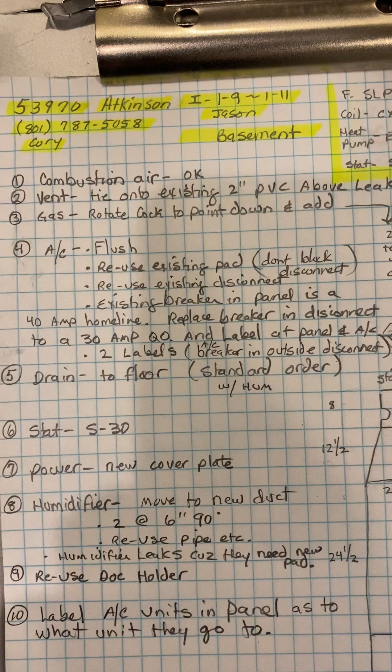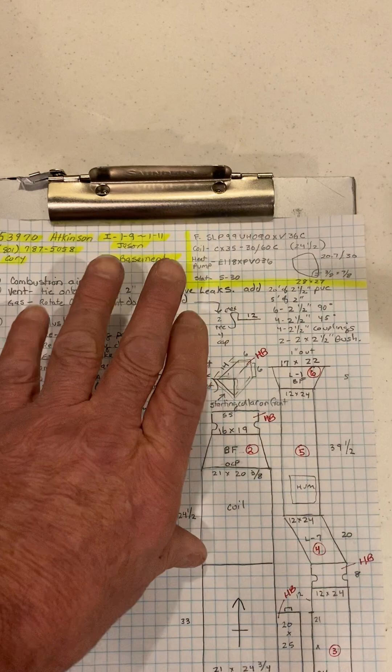Okay, this is on the Atkinson job, number 53970, install on 1/9 through 1/11 by Jason. There are two systems we're measuring. This is video 1 of 2, for the basement system.

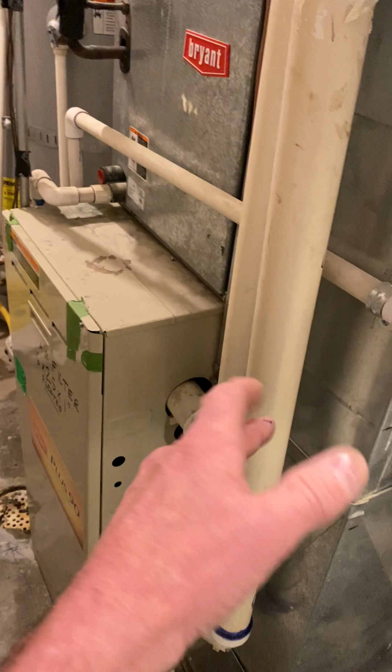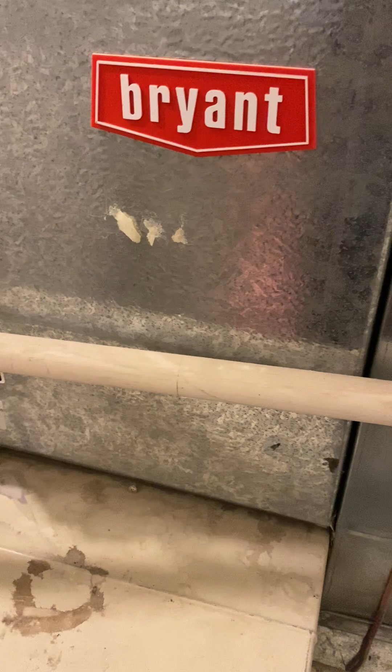So we're switching out this 90% furnace with another 90% furnace, 2-stage, adding a heat pump. The new furnace will sit center where it is now, so it's going to come over 1 3/4 inch on each side.

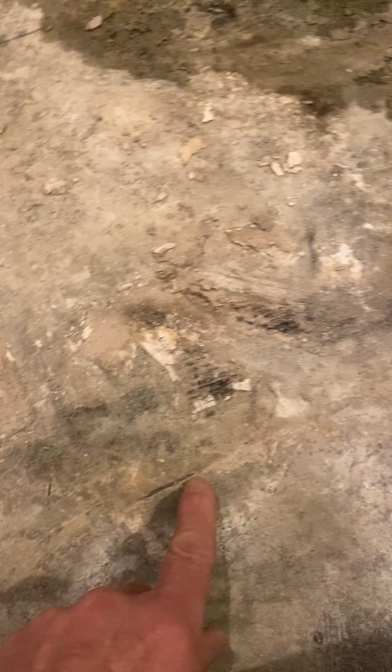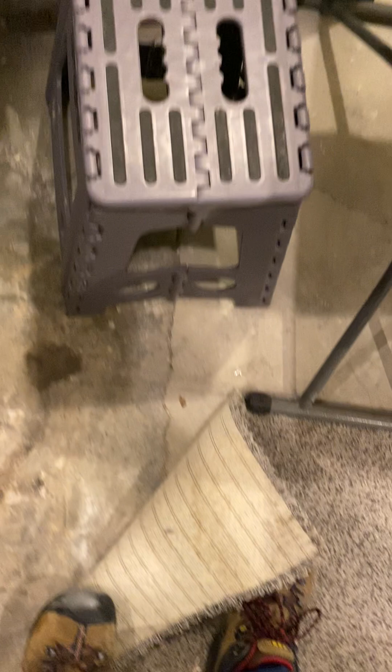Okay, I wrote on the floor if it's still there. Our return air is going to come out to right here, this line, and it's about even with this wall here, maybe out another 1/2 inch or so. It's close to that wall here.

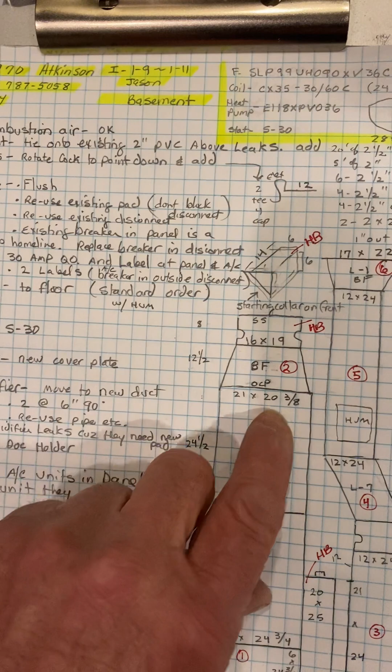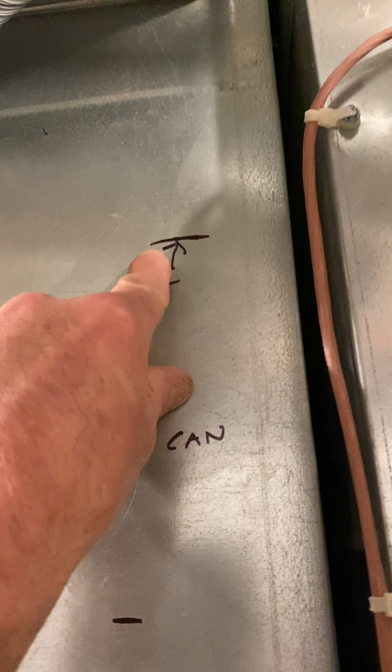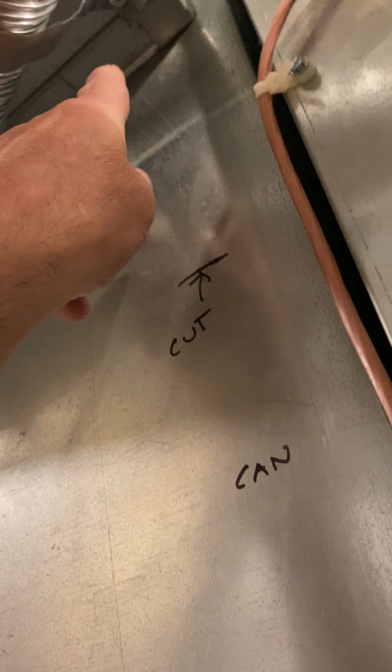Anyway, so the furnace will sit on a base - furnace, coil, transition, and can. We have a starting collar for the front. I gave you a cut line right here, and a 6-inch starting collar. This is 7, so it should go right down to your 1 inch down. You just have to pull this out in front of the starting collar as needed.

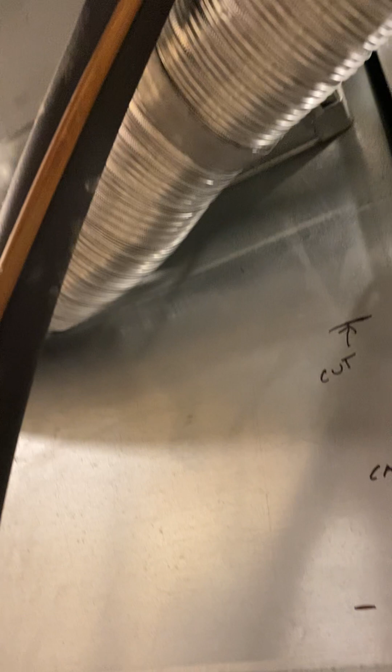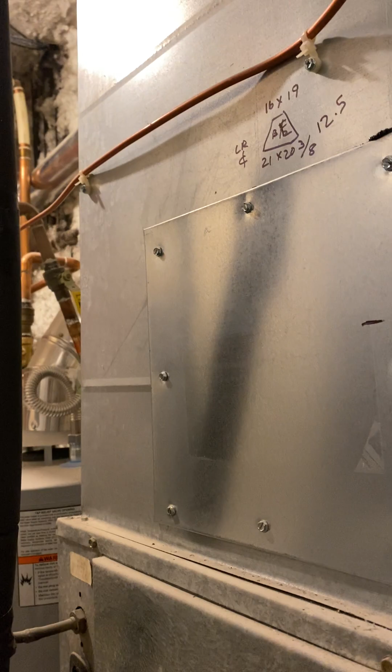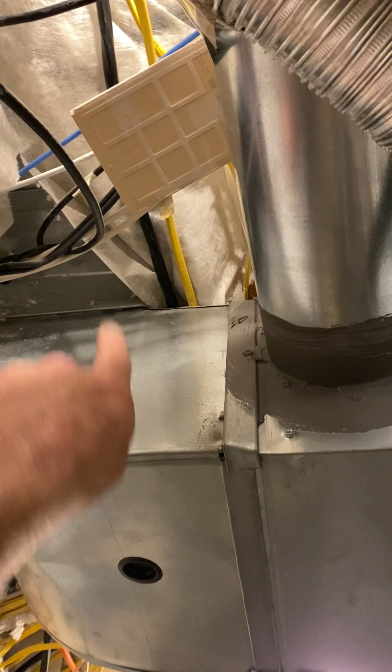Okay, I was debating if you can even get vanes up in here. I know you can get vanes in this one, but to reach around the corner and get them on that top one too, I'm not sure. I'm going to go ahead and give you some vanes to get these, and if you can get that top one, great. But you'll at least be able to get this one.

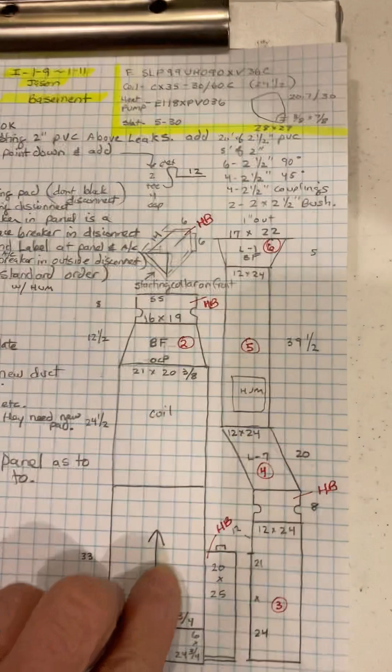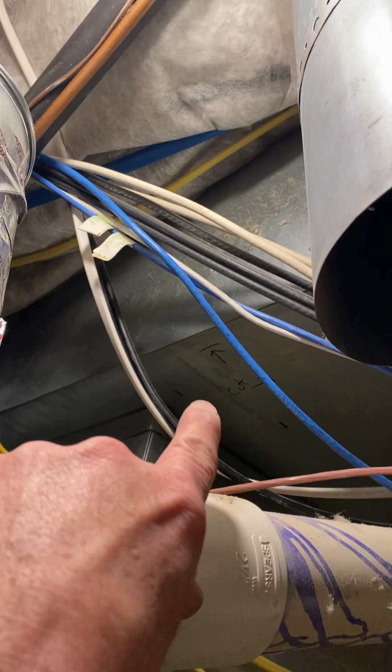Okay, anyway, so the return, gonna put a 20 by 25 filter box on. Return air just as it shows. I'll give you cut lines right there, so it's gonna go over 1 inch, and the rest is gonna go over to that cut line.

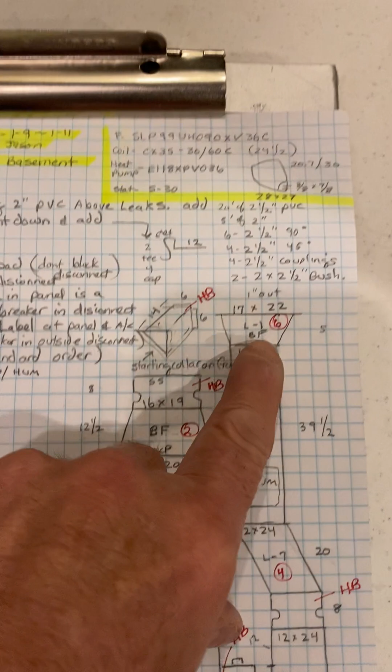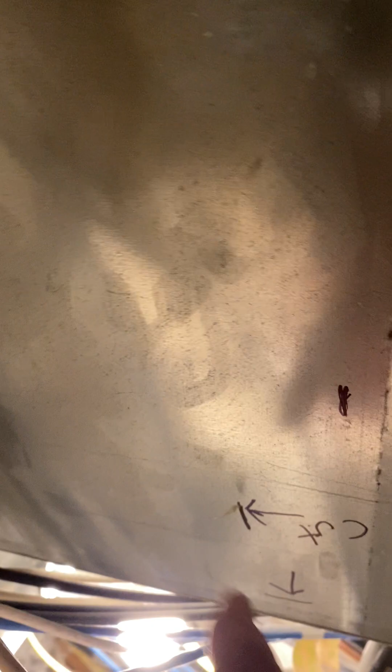I made that 5, so you can see - maybe cut lines over these flues a little bit. But you can see that the flues come in crooked, and they all leak. You can see all the water on the ground from the flues leaking at every joint. So Dwight wants to just cut them back here and add to them, so when you cut them, you can make them straight if you want.

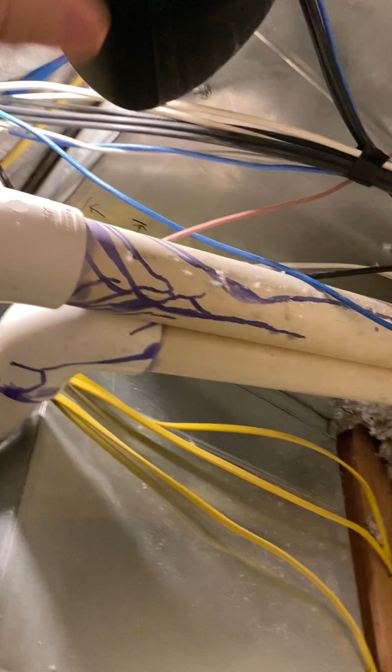And this is 2.5 inch, so I give you 2.5 inch couplings and things. I run them 2.5 inch over and then down, and then I give you another 2.5 inch coupling with the bushing to 2 inch into the furnace. So yeah, just get rid of all the leaking on there.

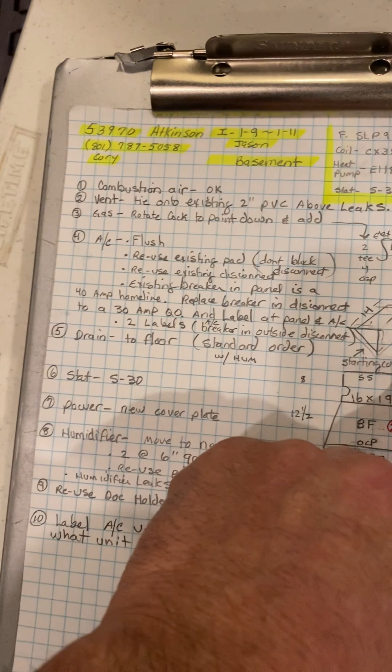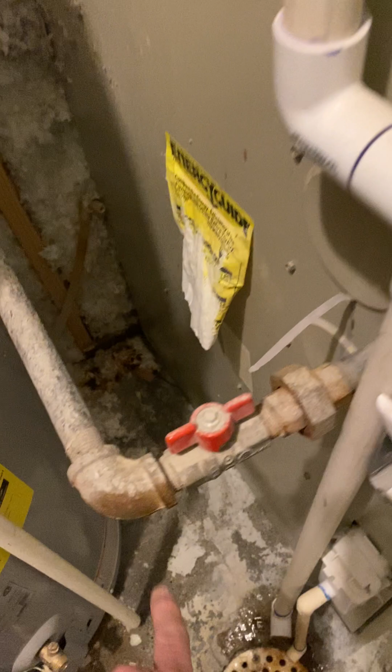Okay, combustion air is okay, it's right there. Your vent, I just told you about that. Your gas - so on your gas, right here, our new furnace is going to come over 1 3/4 inch. So you're going to turn this at 90 with the cock facing down, and you're going to add a T.

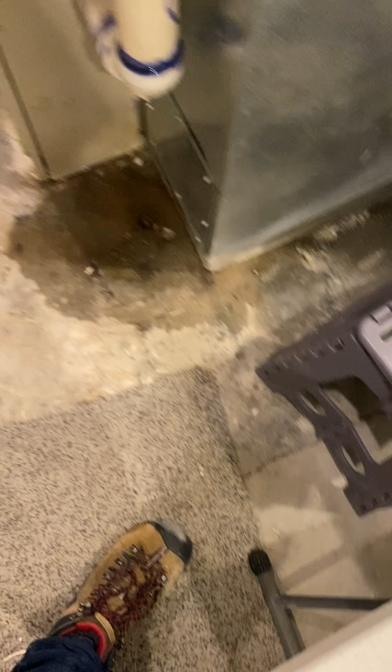With a drip leg and a flex 12 inch into the furnace. Okay, on the AC, I'll go over that in a minute. Your drain is just going to go to the floor, so standard order, but you'll need a little more for the humidifier.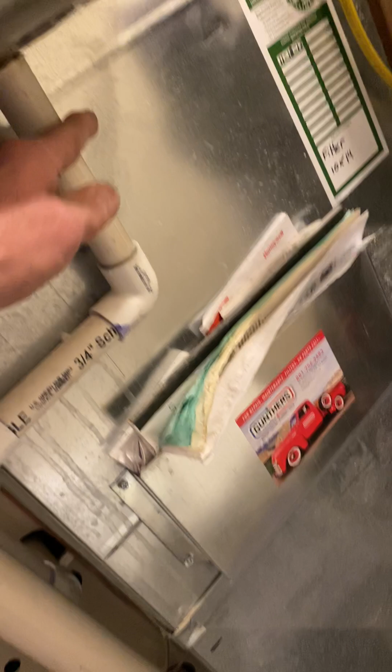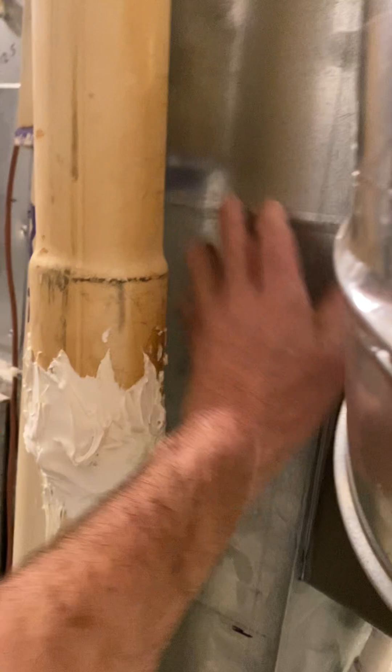We're going to move this humidifier as needed. Figure when you get everything in, if there's enough room at the front, we'll put it right at the front here, because now this duct's going to be way out here and we don't want it coming out into the walkway. So I'd say put it over here and redo the duct as needed. Reuse this pipe, I gave you two 6-inch 90s - you may only need one, but just in case.

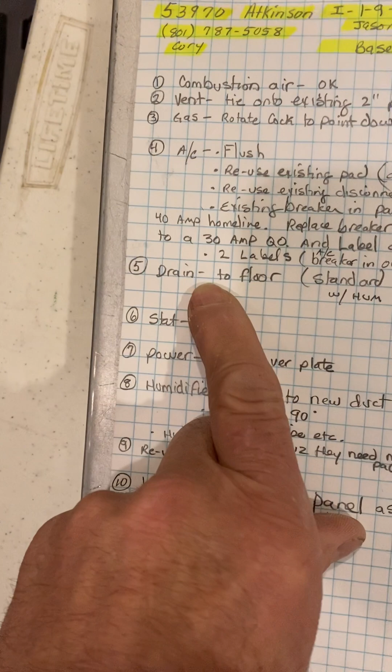Okay, thermostat - you're going to put an S30 stat on. So your power, reuse a box and switch. I'll give you a new cover plate, that one's broken.

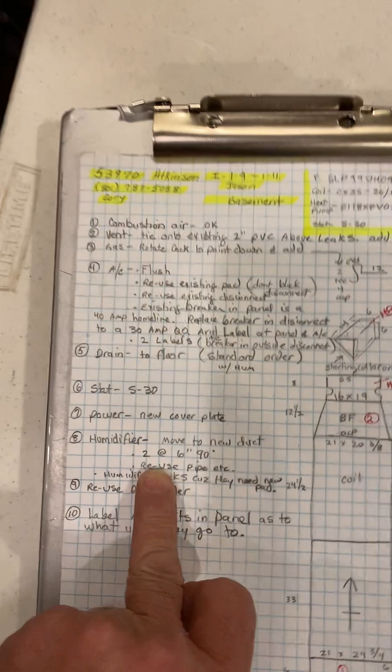So I told you already about the humidifier to move. Also on the humidifier, when you move it, it's also leaking, because the pad in there is so old and corroded, and it's just not doing what it needs. If I see them, they said they're probably going to be gone when I'm done, but if I see them, I will tell them they need a new humidifier pad. Otherwise, you can tell them that they need a new one.

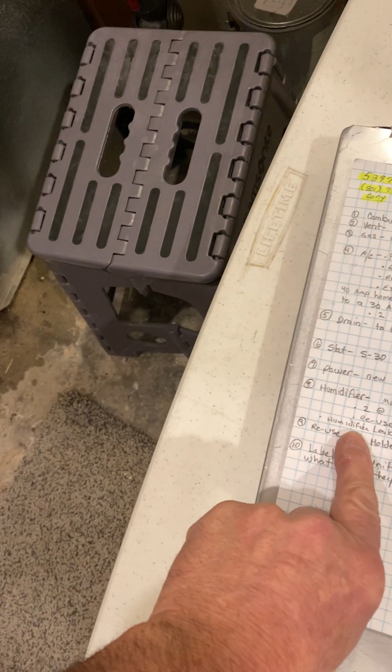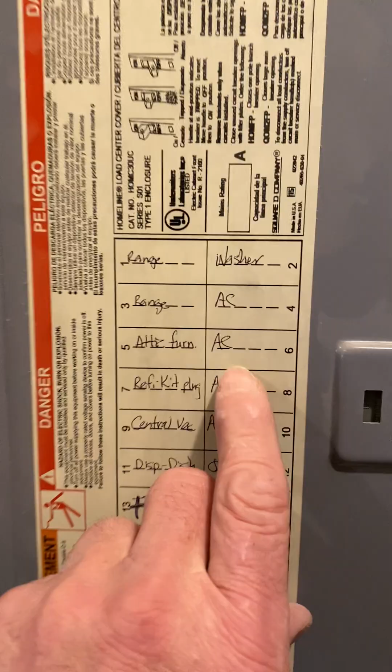Okay, reuse the duct holder. So label AC units in the panel as to what units they go to. Right now in this panel in the furnace room, we have the ACs labeled, but we need to put AC top floor and AC basement, or however you want to label them. They're both 40 amp breakers.

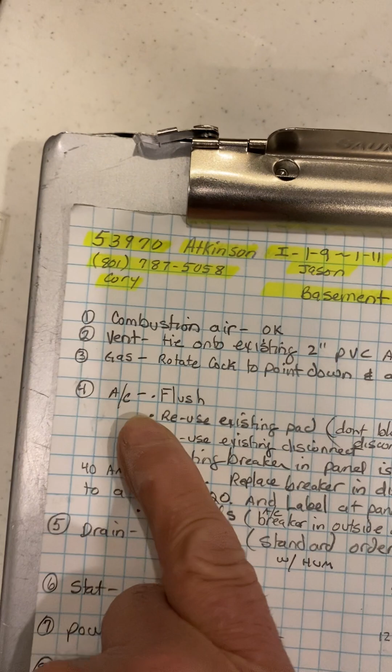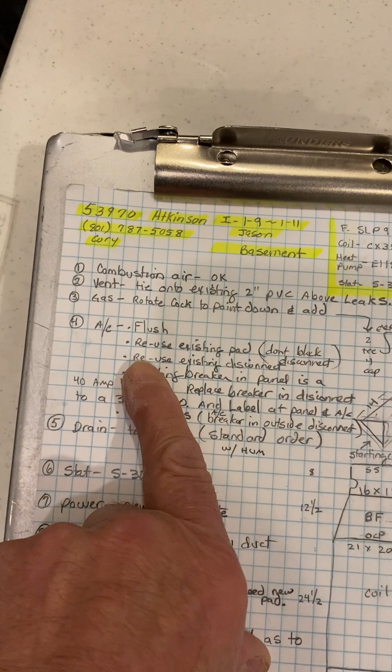So our AC for the basement, the max breaker is a 30. You're going to reuse the existing 40 here, but you're going to put a 30 amp QO breaker in the outside disconnect. Okay, so on the ACs, I'm just going to walk out there and show them to you on this video, and I won't on the next.

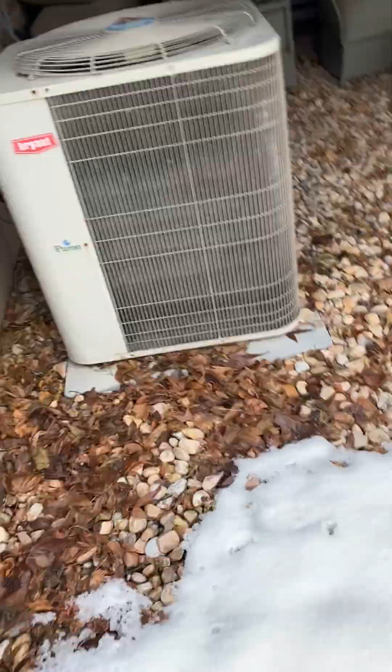Okay, so on the AC, you have to go through the pool. In the gate mechanism, you have to pull this knob at the top here, and then it pushes open. But the ACs are back here. Notice one is just slightly in front of the disconnect, so you probably just need to move the ACs over just a little bit.

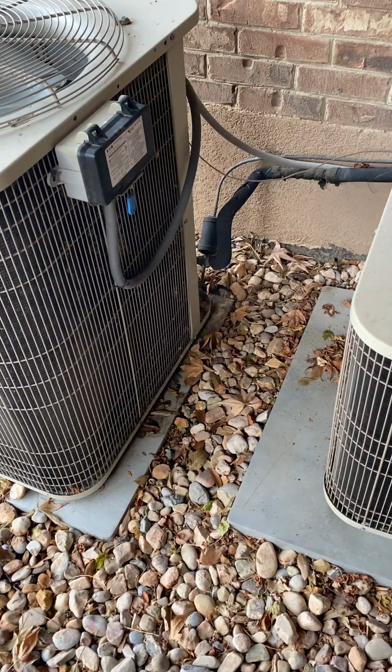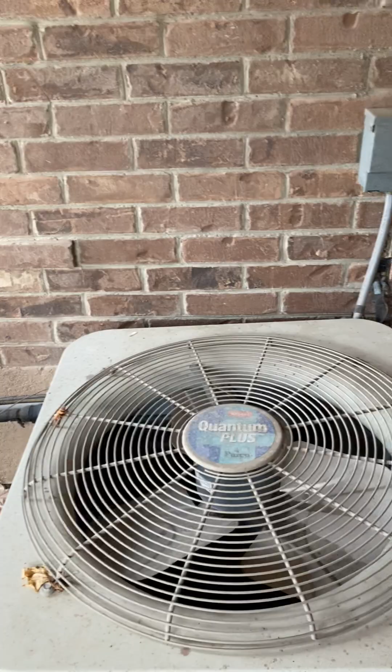And we'll just reuse the existing pads. So on the AC - I'm not sure what one is what, to be honest - but on the unit that we're switching out, or adding the breaker for the basement unit, I'm going to have Brian build a couple tags that say AC breaker located in disconnect, and you need to put one on the disconnect and one on the breaker panel inside. We got called on that in the past.

Anyway, so while I'm out here, you're going to flush the lines, both of them. The one for the top floor, the attic, is 7/8 - it's supposed to be 1 1/8, but it's 7/8, and that's what we're going to run it on. So we're just going to flush that as well. But otherwise, that's that.

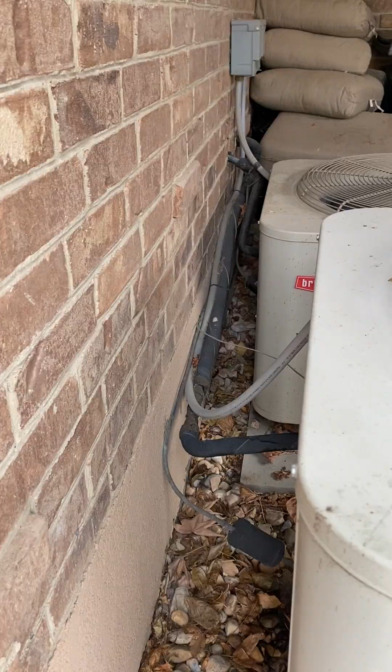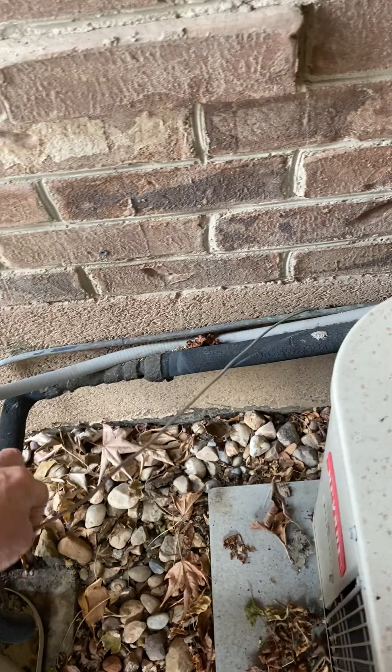And I believe, oh, also on the AC, so you know, they're communicating, and they only have 2 wires, so we'll need a transformer. I believe they all have 2 - they feel like 2. So we'll need a transformer to make the communicating work. And that's it up here. I'll go measure the top floor. Thank you.